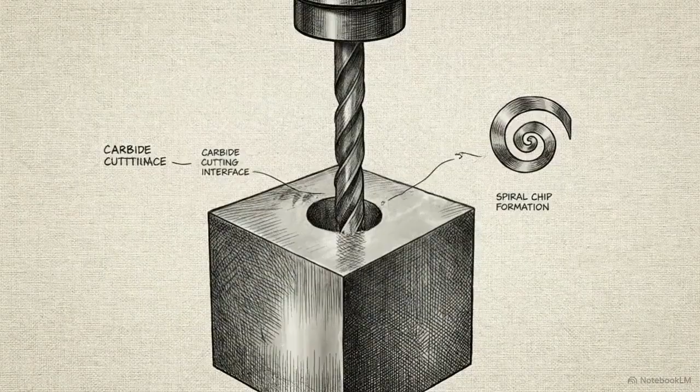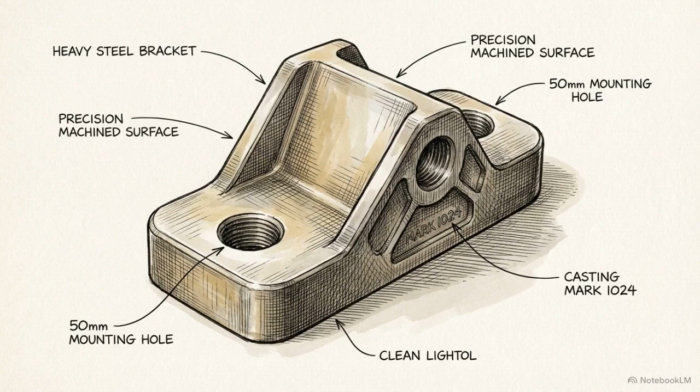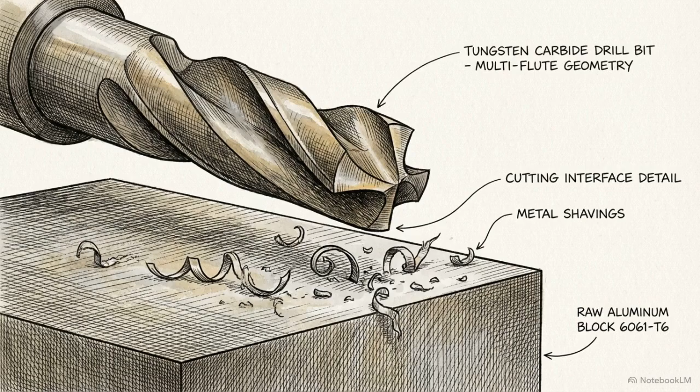Look closely at the physical world around you. From the microscopic components inside your smartphone to the massive turbines of commercial airliners, every manufactured object relies on a hidden foundational technology to exist. That foundation is the machine tool. Often called the mother of machinery, these are the machines used to build other machines. If you want to cut, bore, or shape metal with microscopic precision, this is the equipment that does the work.

Controlling this technology means controlling the very seeds of production. A country that can design and build its own machine tools dictates its own industrial capacity, rather than relying on foreign imports to sustain its factories, infrastructure, and defense. You might expect the heart of this manufacturing power to be evenly distributed across the world's largest nations. Instead, a massive percentage of this precision capability is locked within one specific high-density geographical corridor. That corridor is located in central Taiwan, running directly along the foothills of the Dadu mountain ridge.

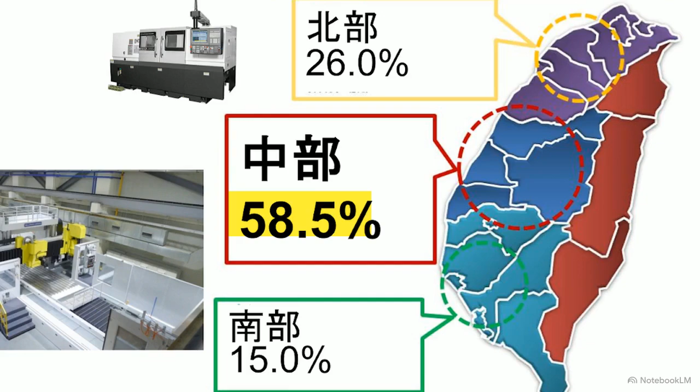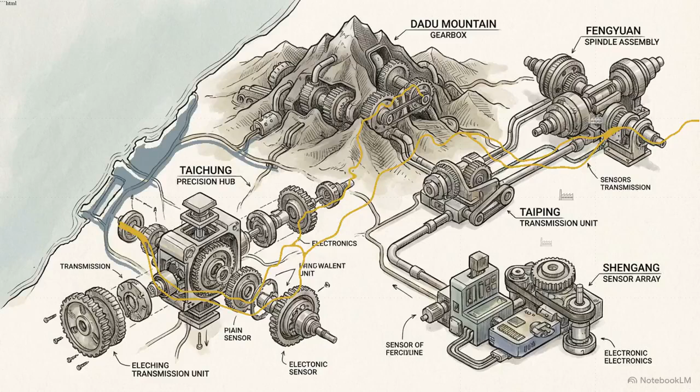This data from 2018 shows the exact distribution of Taiwan's massive machine tool industry. A dominant 58.5% of the entire sector is concentrated right here in the central region, far outpacing the production capacity of both the north and the south. The defining feature of this hub is its extreme density. We are looking at a continuous industrial belt that stretches for merely 60 kilometers. The concentration peaks in 3 specific districts: Taiping, Fengyuan, and Shengang. Within these boundaries, thousands of specialized factories operate in a tightly packed, interconnected grid.

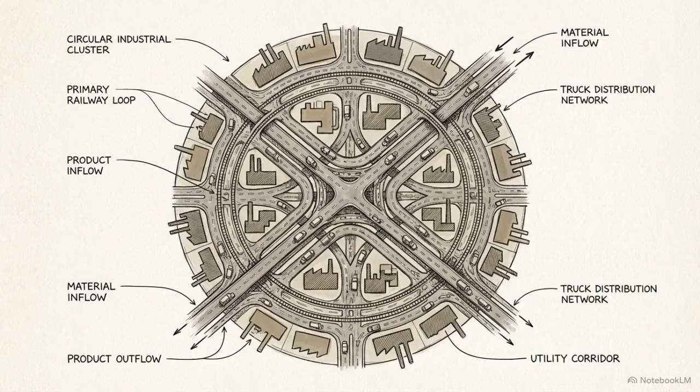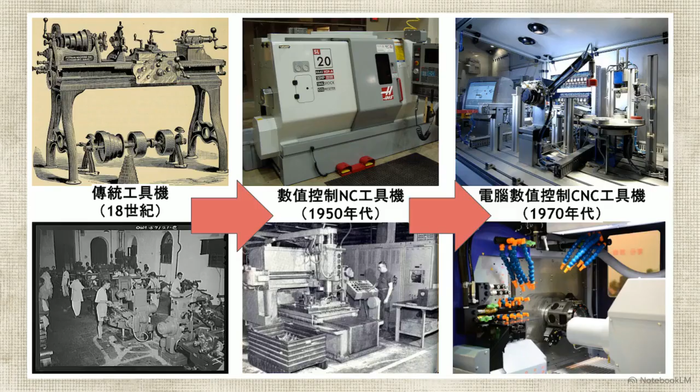This isn't just a collection of factories, it's a localized ecosystem. By condensing thousands of specialized suppliers into a few dozen miles, Central Taiwan has turned this valley into the primary engine of its precision export economy. To understand this clustering, we must look at the technology's evolution. It began with 18th-century manual machine tools. By the 1950s, numerical control introduced automated instructions. The 1970s breakthrough was CNC, integrating computers to automatically execute complex geometric shapes.

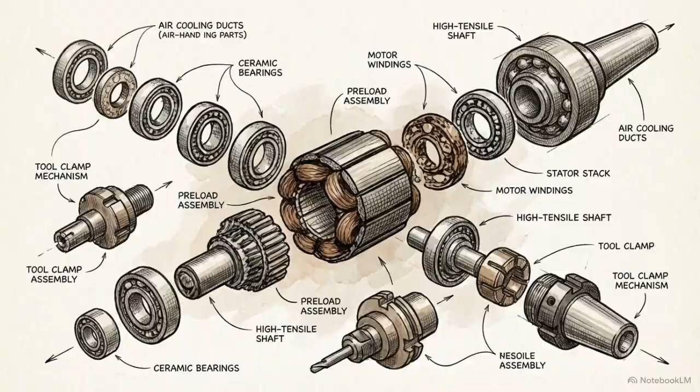But as CNC machines grew more sophisticated, they became too complex for a single factory to build every part from scratch. A manufacturer would need thousands of unique, high-precision components just to assemble one unit. To manage this complexity, isolated factories evolved into a localized network. They moved closer to their specialized suppliers, turning the Dadu mountain foothills into a giant open-air assembly line.

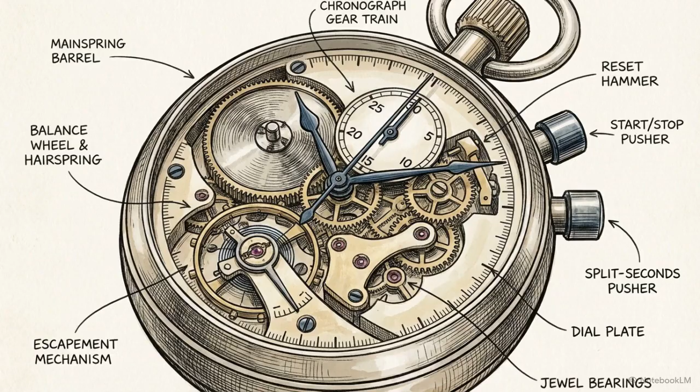Within the cluster, factories are linked like a food web. Raw materials and specialized parts, like precision bearings and hydraulics, funnel into the machine tool builders. Those finished machines then power downstream sectors, from aerospace to medical device manufacturing. The advantage of this density is speed. A builder can source a component, consult with a specialist, and finalize an international order, all within a 60-kilometer radius. This creates a competitive advantage that is physically rooted in the landscape.

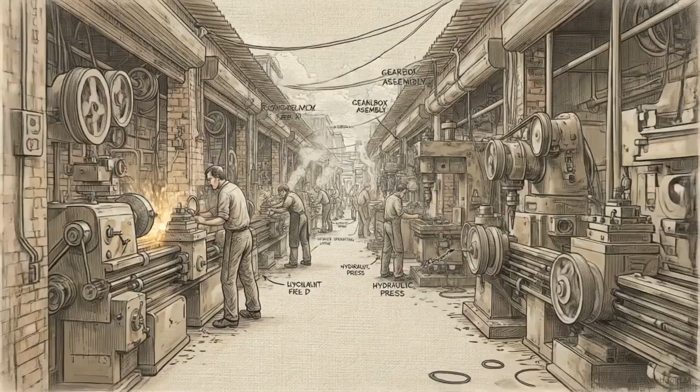Because these specialized skills are concentrated in hundreds of local workshops, this network is difficult for competitors to replicate or move abroad. But even this dense network is facing new threats. The traditional model of the Golden Valley is being challenged by shifts in the global economy and local workforce. As this analysis points out, the industry faces a demographic crisis. A lack of young talent entering the field has created a technical gap, threatening to erase decades of specialized manufacturing knowledge as the older generation retires.

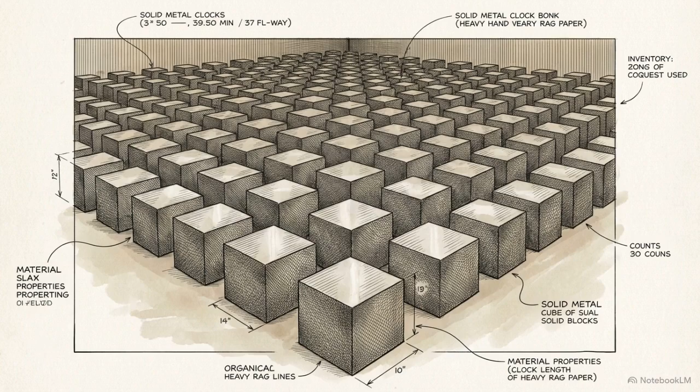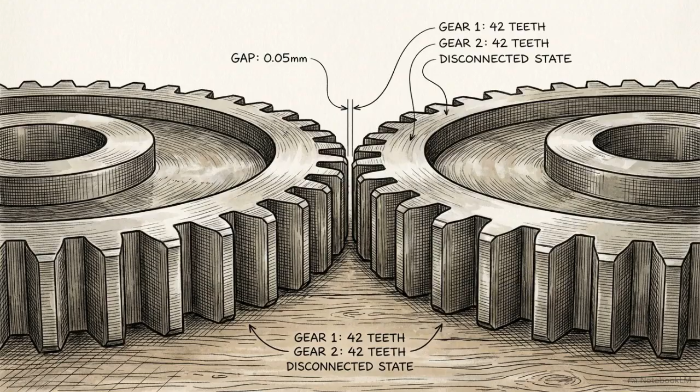At the same time, global demand has moved away from standardized mass production. The market now requires mass customization, small batches of highly specialized parts that need to be delivered faster than ever before. Physical proximity alone can no longer solve these problems. To handle the speed of modern logistics and the loss of manual expertise, the industrial ecosystem has begun to develop a digital nervous system. This is the transition to Industry 4.0. It marks the shift from automated factories to smart manufacturing centers.

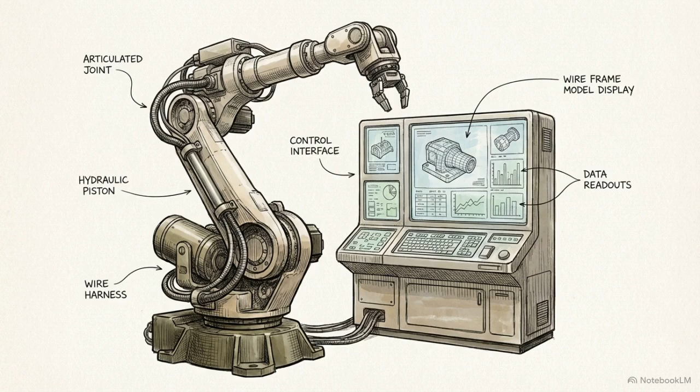The core of this shift is the Internet of Things. By connecting machines and orders to a common data network, individual components can communicate their status and requirements without human intervention. This creates a self-monitoring ecosystem. Machines use big data to optimize schedules, perform maintenance checks, and adjust to supply chain shifts in real time.

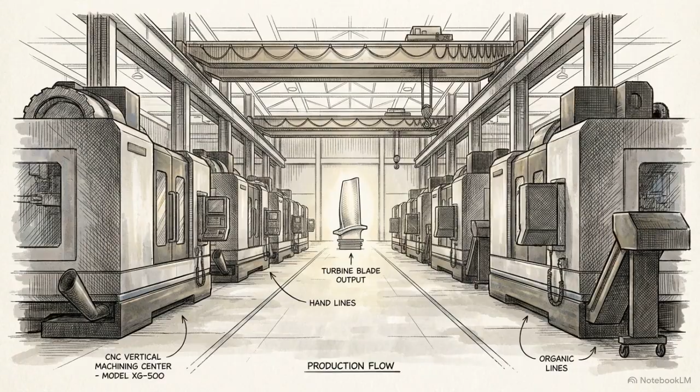The 60-kilometer corridor is now overlaid with a digital network. Information travels between suppliers instantly, making the physical movement of parts even more efficient. The Golden Valley demonstrates how geographic density, when fused with digital intelligence, transforms a traditional manufacturing hub into a self-correcting network, ensuring it remains the foundational engine of modern machinery.